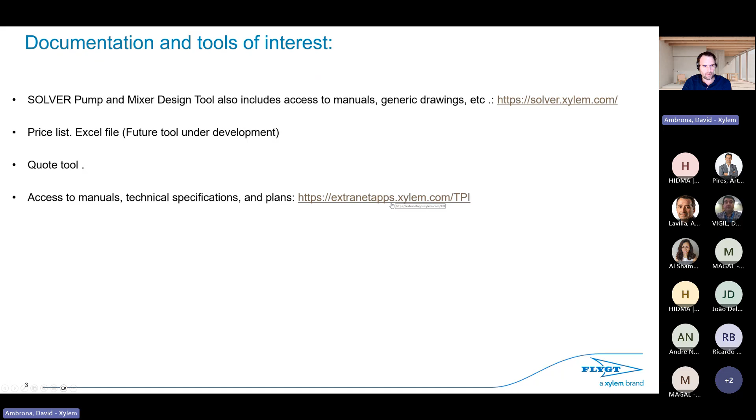Bidding rules — this is very important. I guess you have access to a list of clients that are managed by Xylem directly. I'm not sure how this is organized in Portugal, so in that case, again, contact your account manager.

Where not to design or bid directly from the partner - we've set some rules, though of course we can make exceptions. This is just for better coordination with Xylem. This applies when we're in the project phase, as a consultant, and we want to specify all the Xylem products - perhaps you're managing some of the products, but not all of them from Xylem.

That's why it's important to be coordinated during this phase and also in the tender phase - sorry, the translation wasn't done properly, let me correct it, it's tender phase not bidding phase - because we have multiple contractors from different regions, and a mix of different clients. During the tender phase, when we have many contractors bidding for the same project, this coordination will in theory be managed by Xylem.

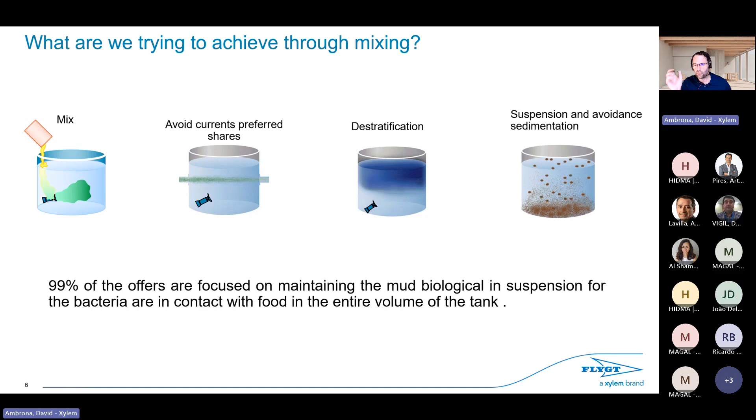This is very important, because even today many consultants and customers are still designing with the wrong parameters, I would say. We even have a book at Xylem that we developed - a mixing handbook, maybe 50 or 100 pages, I don't remember, it's quite intensive - that explains the theory of mixing. This is just a summary of that handbook.

What is important for mixing is the process requirements, which depend on the particle size, the density of the particle, and other things. This process will require a specific speed, which we call bulk velocity, because in a tank we need to maintain a specific average speed or velocity throughout the whole tank. That's why it's called bulk velocity. To keep this velocity, which avoids sedimentation of the particles, we need a push or thrust from the mixers. So this is the parameter that we need to design a mixing tank.

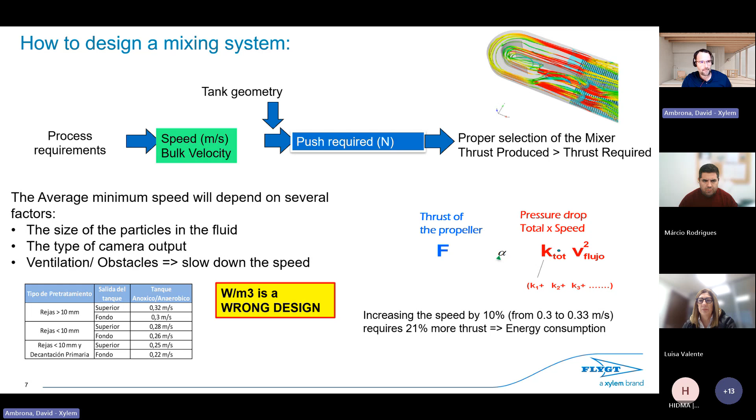So in order to also explain to the customer about such a wrong design ratio, we have these two formulas that explain the push or the thrust of the mixer and the performance, the efficiency of the mixers. There is a relation with the speed of the blade, the rotation of the blade or propeller, and the diameter of the propeller.

So at the end, the most efficient mixer is the one that provides a lot of thrust with low energy. To achieve this, that's why we have the banana blade—a mixer that has a big diameter blade, while the speed, the rotation, is pretty low.

We can do this because we have a gearbox here. That's the way we reduce the motor rotation speed to a much lower rotation speed. This is the reason why the banana mixer is 5 times more efficient than this one for the same application.

Here we did a simulation of the same tank shape, length, width, and depth of water. As you can see, it's exactly the same shape, same volume, designed for the same velocity. What we change here is only the model of the mixer: these are the banana mixers, and these are the compact mixers, similar to this one.

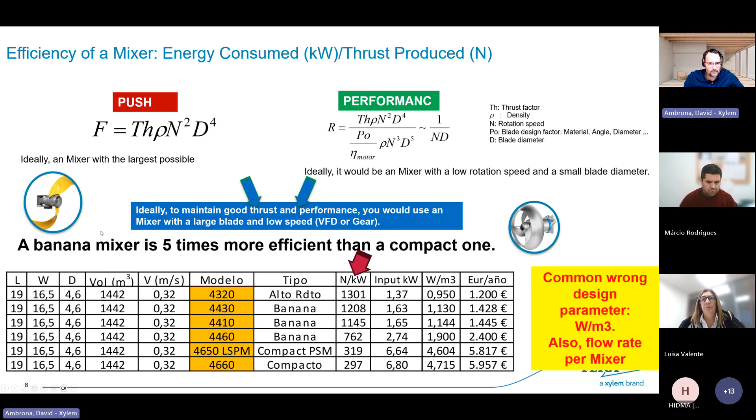Also very important when we're talking about thrust is how to measure the efficiency of a mixer. I can say that one of my mixers can provide, let's say, 1,000 newtons, but how do you check it? How do you check it? How can our objective customer test this?

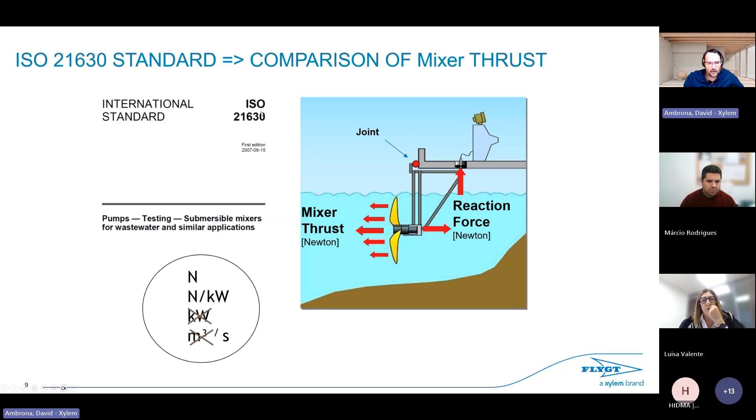There is an ISO standard that specifies how to measure this, and we have at our factory in Emmaboda, Sweden, a bench test where you can even test the mixer thrust. There is a rule or regulation that describes how to do this process, so all our specifications—the thrust you see in our technical specifications—follow this international standard norm.

Something also important to understand: if we're talking about biological reactors, the main application for mixers, this is a conventional activated sludge plant where you have a biological reactor and then a secondary clarifier where you separate the sludge from the treated water. The treated water goes here, and here you have the sludge—almost 100% of the sludge is recirculated to the biological reactor, and the other sludge goes to the sludge treatment line.

So we need mixers in the biological reactor, but usually, as I said before, when we don't have aeration, there are some chambers—anaerobic, anoxic, or even facultative—where you need to apply mixers. But there are some specific, non-conventional biological reactors that it's important for you to be familiar with.

For example, MBRs. MBR is a membrane biological reactor where, instead of using a sedimentation basin, you use UF membranes to separate—to split—the sludge.

For these applications, this title is in green, meaning that from the design point of view of mixers, you don't care. You can design an anoxic zone the same whether the customer has an MBR or not—it doesn't change anything. So the design for a mixer for a conventional biological reactor and an MBR is exactly the same. It's just the dimensions of the tank, that's all. For SBR, it's the same.

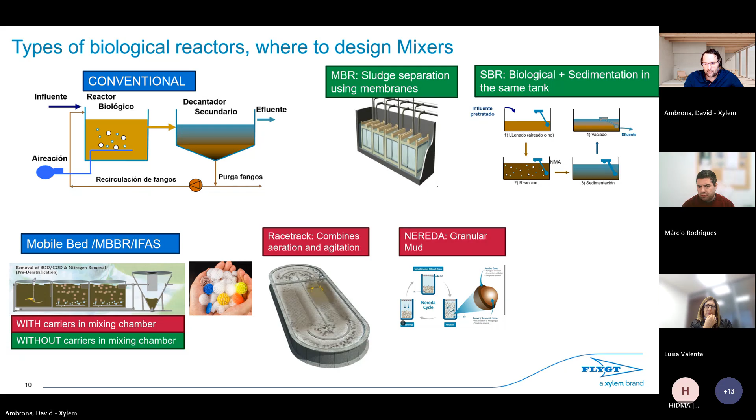Okay, our products, I guess you already know all of them. Just to inform you that the 4610 is phased out, so we should not continue promoting it. It has been replaced by the 4620, because in the past we did an exercise of simplifying our portfolio in order to be more profitable and not have too many models.

We don't have the IE3 motor on the compact ones, okay, but we have it on the Banana, okay. We have the fixed speed mixers portfolio and the variable thrust mixers that have the VFD integrated in the mixer. We have compact mixers, as I explained before, and then the Gear 1 or the Banana ones. And the same with the integrated VFD, which we have with the compact mixers and also with the banana mixers.

Okay, so we have all of these models for the compact one and all of these for the banana. For the integrated VFD, just for your information, which I think is very important, all of these mixers include an equivalent IE4 motor, and we have 2 models for the compacts and 1 for the banana.

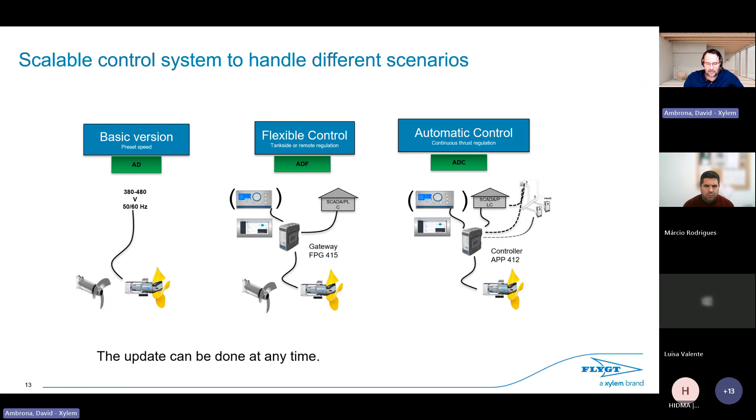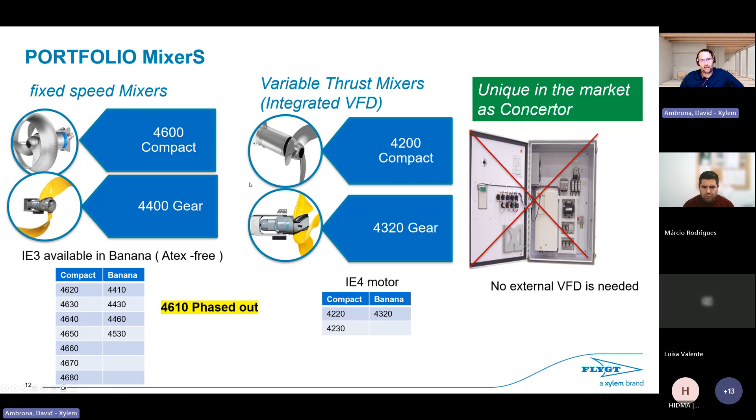Anytime you want, because the first way to learn is learning by doing, if you have these VFD situations or scenarios, please contact us so we can help you better select the right gateways and control systems for when you want to sell these kinds of mixers. Again, these kinds of mixers are very important to promote because we are unique, and it's the best way to improve the efficiency of a mixer, which I will explain later on.

If we are talking about variable thrust and why we need it, as you probably know, in many biological reactors, a mixer is not like a pump. Depending on the configuration, you can adjust a pump to provide more flow rate for the same pressure, but if we have a mixer in a chamber, that mixer is running at full speed all the time.

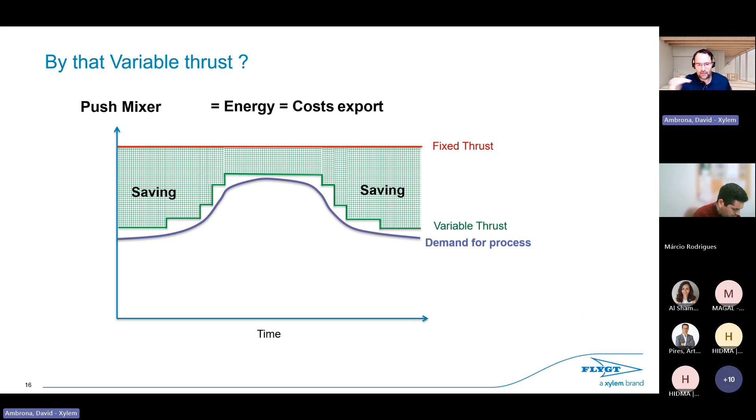But from the process point of view, you don't need the tank or chamber to be fully mixed all the time, because sometimes during the night, for example, you don't need complete and perfect mixing in the chamber. You can turn down or adjust the thrust of the mixer, because even if you reduce the thrust, you keep enough suspended biomass in the tank, and you are consuming less energy in the mixer.

Something where this variable thrust has more impact is in the racetracks. The reason is that the aeration from the diffusers, when aerating the chamber, acts as a kind of brake on the velocity of the racetrack. So for example, if the mixer is always pushing at the same thrust, the velocity of the racetrack will change if the aeration is increased. If you increase the aeration, you will reduce the velocity of the racetrack.

That's why when we are doing the design of a racetrack, this is something we want to keep at Xylem, but we will see in the future, we also allow and provide you the tools to do it by yourself.

When you increase this aeration, we obtain different thrust. For minimum aeration or without aeration, because sometimes in some plants people are playing with a biological reactor, they turn off the diffusers, so the only obstacle is the grids physically, which is already an obstacle for the velocity. Sometimes during the night or with less flow rate, they need minimum or medium aeration, or during the morning peak with a lot of ammonia and BOD, you need to increase the aeration of the diffusers. For these 4 situations, you will obtain 4 different thrusts from the mixer.

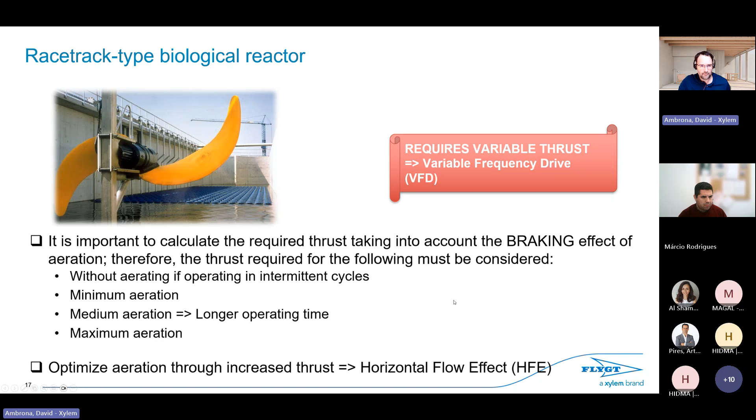Then we have another important impact on this design called the horizontal flow effect. In a racetrack, for example, the aeration grids supply air from the bottom, and the water goes from left to right because of a mixer pushing the water in this direction. If you design a conventional mixer with conventional thrust and velocity, you will have problems at the inlet and outlet of the aeration zone.

You will have this kind of vortex creation, and this vortex causes all the bubbles in this zone to go up much faster than others. So the contact time of this bubble in the water is less, since the uplift velocity is much higher, and they transfer less oxygen from the bubble to the water. That's why this design has a negative impact on the aeration efficiency.

A way to balance the impact of this vortex is to increase the speed of the mixers. If you increase the speed of the racetrack, you will neutralize this vortex phenomena and improve the aeration efficiency. Tests have shown that increasing the velocity can improve aeration by 10 or 20%, and you can save about 15% of energy, because pushing at higher velocity consumes more energy in the mixer, but you save much more energy on the aeration, since aeration always consumes more energy than the mixers in a wastewater treatment plant.

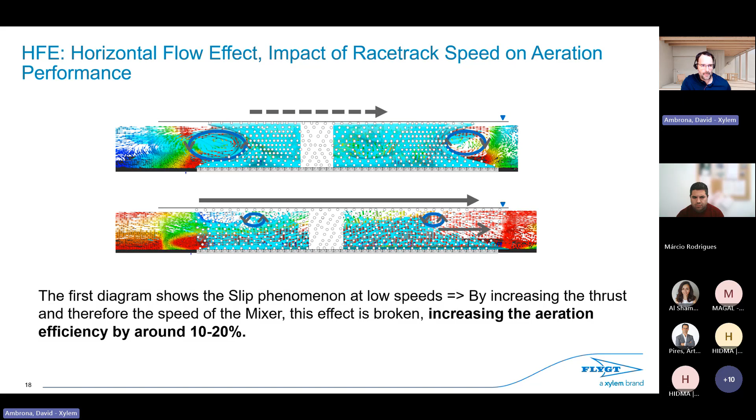I don't want to spend too much time, but here's an example: using a fixed speed mixer, this conventional banana, we have a fixed energy consumption of 7 kilowatts. But if we use a variable thrust mixer, the 4320, we can adjust the consumption of the mixer depending on the aeration, and you can save even 40% of energy.

Changing the mixer from the conventional banana to the VFD banana can be only a 15% price increase, and you can deliver to your customer 40% energy savings. Again, this is something only Xylem can do - the competitors don't have this kind of mixer. That's why it's very important that we convince our customers with this type of variable thrust mixers.

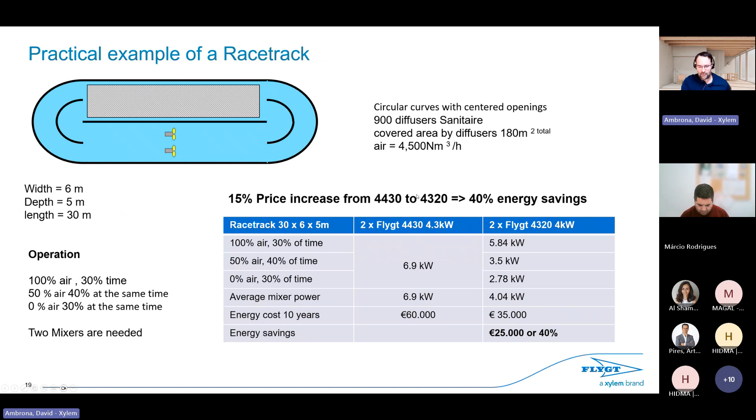Even in a plug flow biological reactor, where you don't have the racetrack loop - even in this, which I imagine is an anoxic chamber - you don't need to mix this chamber 100% perfectly. Even if you mix it 70%, the biomass is well mixed enough, perhaps good enough during the night, and you can achieve the same effluent requirements in the wastewater plant while reducing the energy of the mixers.

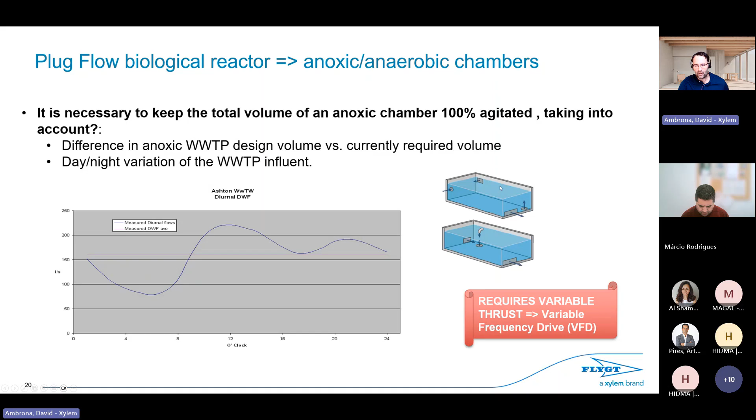This, of course, is more useful and makes more sense to apply and suggest when we are talking about the big biological reactors. In a small one, don't spend time on this.

Also very important, when we are trying to convince a customer, and this is a clear example that we have in Spain: the wastewater treatment plant of Bilbao, north of Spain, capital province. It's a huge wastewater treatment plant. As you can see, the size of this biological reactor. This is a plug flow biological reactor, so this is an anoxic chamber, a huge one.

In many plants, they are using compact mixers, a lot of them. But in this plant, the end user preferred to use banana mixers. And now we are selling even the banana with VFD because it consumes much less energy than with the compact mixers. And depending on the size of the banana, you can even use the conventional guide bar that we use for the compact ones.

But what is important, of course, is when you install the banana, you have to be cautious with the distance from the banana to the wall. With the compact mixers that's not so important because the blade is much smaller, but with the banana, the position is very important. Sometimes we need to do some kind of extension in order to install the banana far away from the wall, because there are some distances that we have to respect.

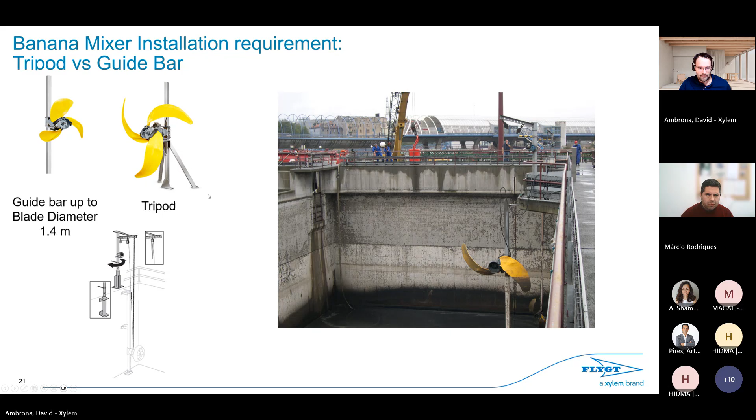Another example, but again the main one is the racetrack, I would say, and the big anaerobic anoxic chambers, is when we have a sludge storage tank that the customer is asking us to install or design a mixer for. For example, the concentration of solids in the sludge is so high compared with a biological reactor - we're talking now just about the sludge treatment line, not the biological process. In the biological process, you never reach this kind of concentration.

But in the typical sludge treatment line of a wastewater treatment plant, you can achieve concentrations about 2%, which is equivalent to 20 grams per liter. Sometimes they are mixing different sources of sludge, and that's why the concentration of the sludge in such storage tanks changes. When we're talking about concentration around 2%, the thrust that you need changes based on the concentration.

Below 2% or 20 grams per liter, the thrust is the same - if it's 1% or 0.2%, it's the same thrust. But above 2%, because it behaves as a non-Newtonian fluid, you will require different thrust. That's why at 3%, 5%, same volume, 6% or 10%, the kilowatts or thrust of the mixers is completely different. If you have a variation between 3 and 10% concentration of the sludge, it means you need 10 times more energy or 10 times more thrust.

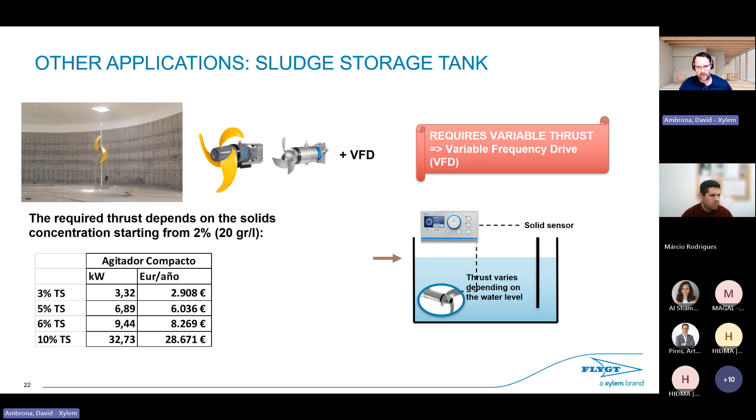Also, sometimes customers don't trust our design because they think that the mixers we are offering don't seem big enough. So one way to justify to a customer that our design is good enough is measuring the velocity in the tank with different sensors, or the homogeneity of the solids - measuring the concentration of solids at different points and different depths - in order to convince and demonstrate to the customer that we are mixing with...

...a confidence of plus minus 10%. This means that if you put different MLSS sensors to measure the solids at different points in a tank, the difference between the sensors cannot be more than plus minus 10%. This is something like a process warranty, but it's very important - if you need to convince a customer with this kind of approach, we are telling you that we can do this, but it should be very special, and you should never offer this without contacting us first.

And also the try and buy. Sometimes, for example like Concertor in the past, and now with these VFD mixers, sometimes the best way to convince a customer for a new kind of mixer is to test it. So if you want to apply a kind of try and buy for these VFD mixers, that's something perhaps we can do. But before offering this to the customer, if you see this possibility, please also contact your account manager to validate it.

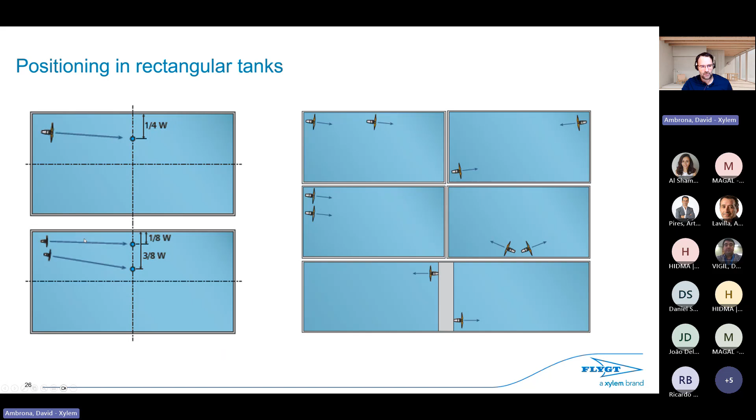Also, it's less common, but we also have circular tanks. Again, the best way to learn all of this is case by case, so contact us. This is much less frequent — 90% of the applications are the previous one.

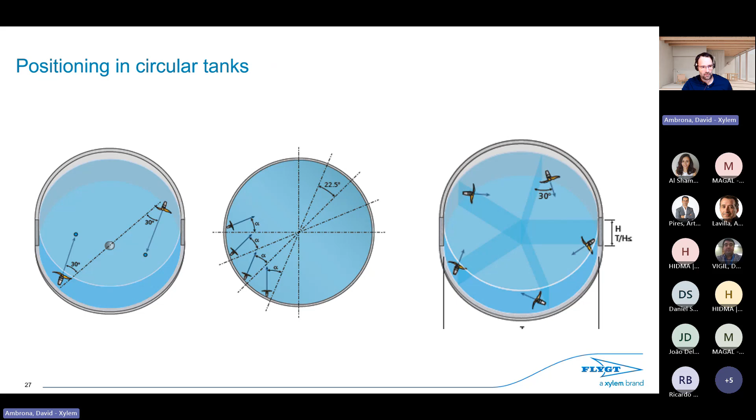Also, as I said before, for the racetrack, please contact us, because there are a lot of different positioning considerations, not just for the mixers but even for the aeration grids that have to be used. This is very important because this is perhaps the most complex application for mixers — if you don't follow these distances properly, you can have vibration and problems with the mixers.

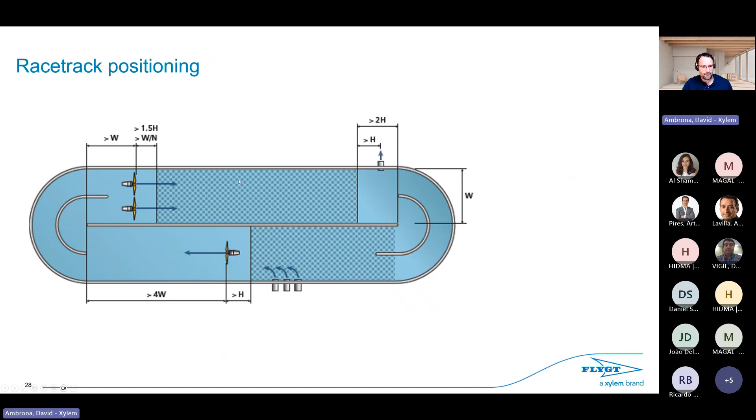Any questions? Otherwise, I will hand over to Kenda to explain how to use the design and selection tool.

Sure. Good morning, everybody. My name is Kenda. I work now for WSS segment as a business developer, but in the past 8 years, almost, I was working with mixers. So that's why now I'm doing the part of the selection of mixers in the solver.

Okay, so I will share my screen. We will be switching between two documents. The first one is this design guide for mixers, and then the tool, the solver tool here.

So I guess most of you have access to the solver tool, I think. If not, you need to register. So you register — oops, here I will switch.

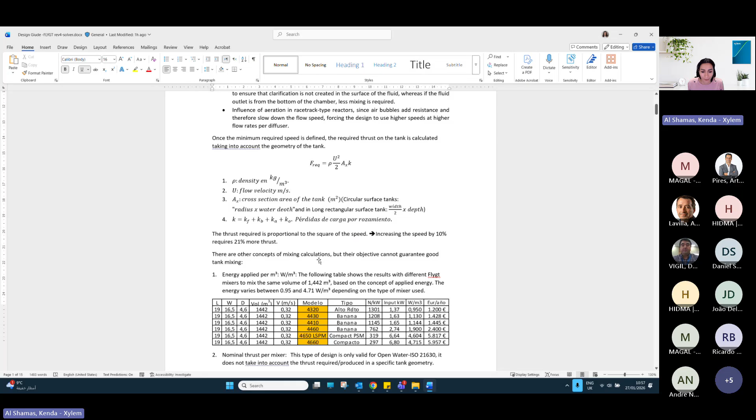Here we start, so you need to go to this link. If you don't have it, I think David mentioned it in his presentation. Then you have to, do you want to register? You have to contact Domingo to ask him for access to the mixer design. Even if you have access to the solver now, you might not have access to mixers because of some limitation there. So Domingo should allow you to enter the mixer design as well.

Here we start, so the first one — you have to open applications by application or by product type, or by search. We usually use search to be able to design for the conditions we have. So you must default to this path: search and get started. All of this is here.

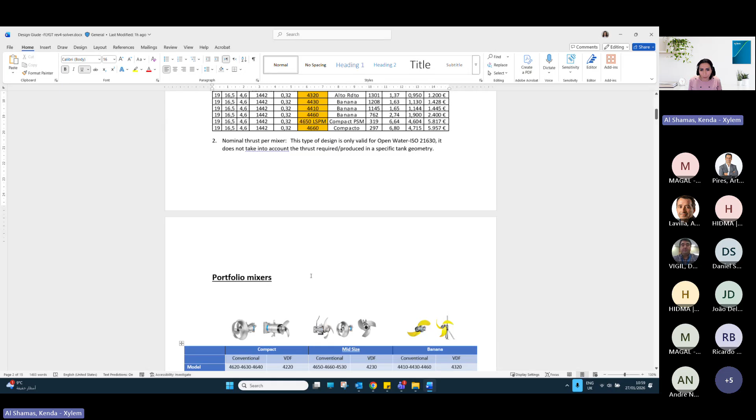But before I go, I will just show you something. Here is a general concept of mixing, which is what David was explaining — it's just a short part of it, okay?

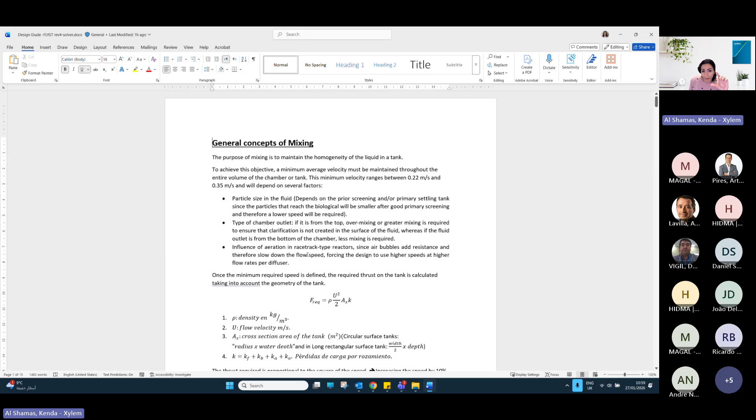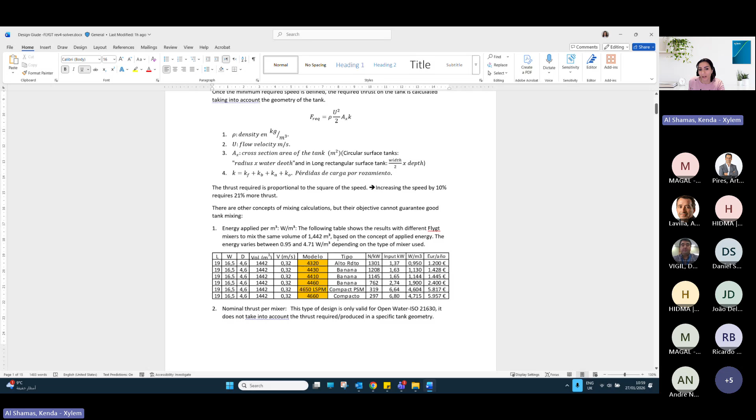Just a summary. So the wrong concept to design with watt per cubic meter. This is just for your information. And then a summary of our Xylem portfolio from the mixer side, divided into 3 types.

Compact, which is the smallest one, the conventional, and the one with VFD which is IE4. You have the range of thrust we can offer. In the compact mixer, we don't have IE3.

Sorry, I mix between Spanish and English sometimes. IE3 is not available in compact mixers. Meanwhile, for the mid-size it's like 4650, 4660, and 4530. 4530 is only available in IE3, for example.

So this is a summary of what we have. The banana mixer, whether we have it in 2 or 3 blades - here we always have 3 blades - and what kind of material we have. Here I mentioned that the 4410 is now only available in IE3.

In the past, we had the standard one, then conventionals, then without IE standardization, and now with IE3. So this is for the banana mixer. But with this initiative to simplify our product line, the 4410 standard one was taken out of our portfolio.

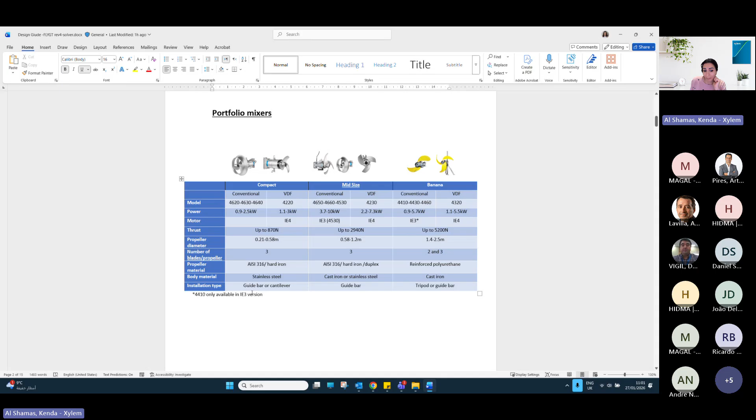So here you can consult to have an idea of what we have in our portfolio, and also the installation type - whether it's with guide bar, with cantilever, or with a tripod. So now we go back to the tool.

Here is how to get access as we explained, and here is the get started section. Here we don't have anything yet, so we need to add the product.

So we go to SR, and you have 1, 2, 3, 4, 5 types. So I will repeat it 5 times to get all types of mixers.

So now I have 42 and 43, which is IE4 with VFD, integrated VFD - this is the variable frequency. And 44 is banana, 46 is compact, and 45 is the mid-size with IE3.

Here it's explained - you have to add SR products and repeat the step 5 times to have all the models. Then we go on - now we need to select the tank shape.

If it's circular, rectangular, racetrack, or closed ditch. As David explained...

If it's racetrack or closed ditch with diffuser, the Xylem application engineer will do the design for the time being, because it's usually combined with diffuser design as well. The diffusers should also be considered in this design for the mixers.

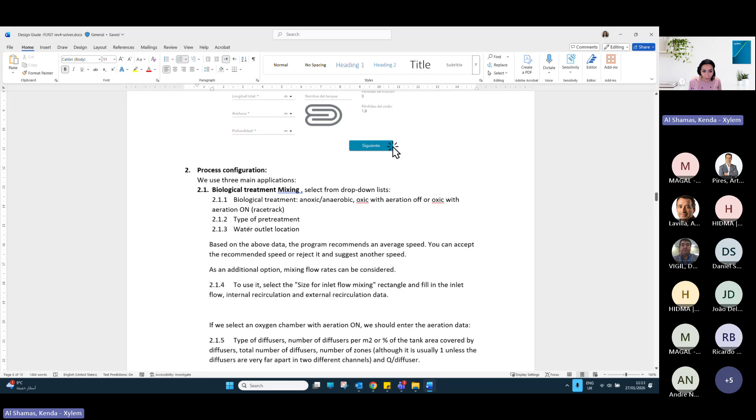So the third item we should identify is if the outlet location in the tank is top or bottom - the water outlet location. If it's in the top, look, now we have recommended velocity 0.25. So we say in the top, but if we tell the program that the outlet is in the bottom, it will reduce the recommended velocity. Why? Because if the outlet is in the top, we need to avoid clarification.

Sometimes the liquid gets clarified at the top, at the surface. So to avoid this, we need to overmix, and it depends on this. There's a velocity recommendation - for example, at the bottom it's 0.19, at the top 0.25. So we'll keep it like this as a primary, the top 0.25. Sometimes we can size the mixing more accurately.

Here when we put size for inlet flow mixing, in this kind of configuration we need the inflow rate coming to the biological basin - the internal recirculation and external recirculation. You might have like 100 cubic meter per hour. The internal recirculation might be another 100 if it's 1Q or 2Q, so another 200. So it's like 300, you can put here 100.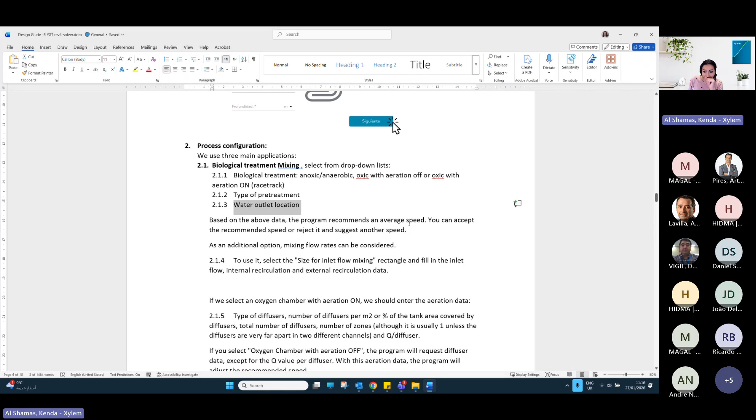Based on the above data, it will give you the recommended velocity so you can reject or accept it. Then size for mixing, the rectangular one. So this is what I explained.

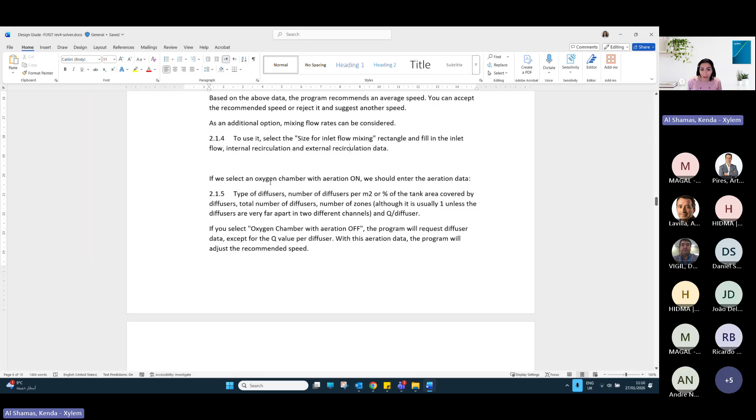If you select aeration - even if it's not your responsibility, I'll explain it a little bit - the program will ask you what kind of aeration you have. You have to enter the bottom area covered by diffuser. If you have a racetrack configuration, you have to see what area is covered by diffusers and enter a number of diffusers, and then the percentage will be calculated. If you put like 10, the percentage will be calculated.

You need to add one on another, so if the number is like 15, you need the flow rate per diffuser as well. This depends - there's a lot of information here. You need to be aware of the design of diffusers - might not be Sanitaire 9-inch, might be another type or managed diffusers, and you can configure them. You need to select which kind of diffuser, the area of the diffuser, click add new, and select the active area. It's more advanced, but you can discover it yourself.

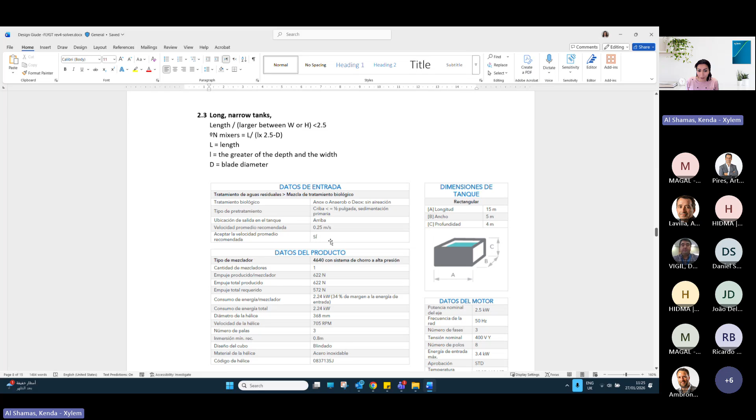It's explained here, then you can view the results. Here, narrow tank, here is a slurry. We select manure, and in the manure you need to add the version 300 or 310, 311 in the Phoenix, but also the tool will show you just the type of mixers available for this kind of slurry.

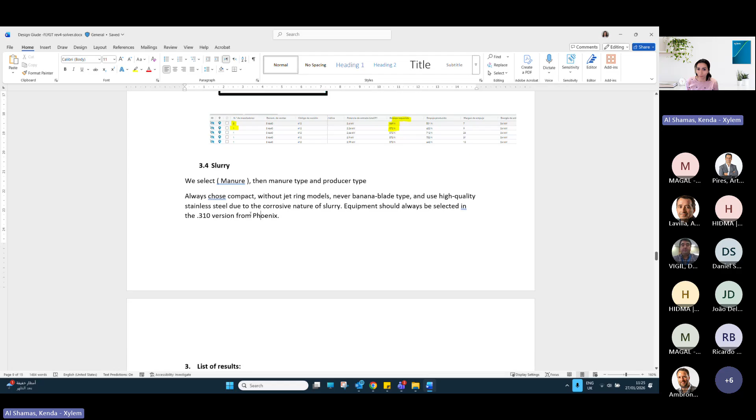We will go back to the biological treatment - here's the one, and to see the results. Now we are in the phase to see the results. Later I will explain the long narrow tank. So here we have different types of mixers, how to select. This one I will come back later to.

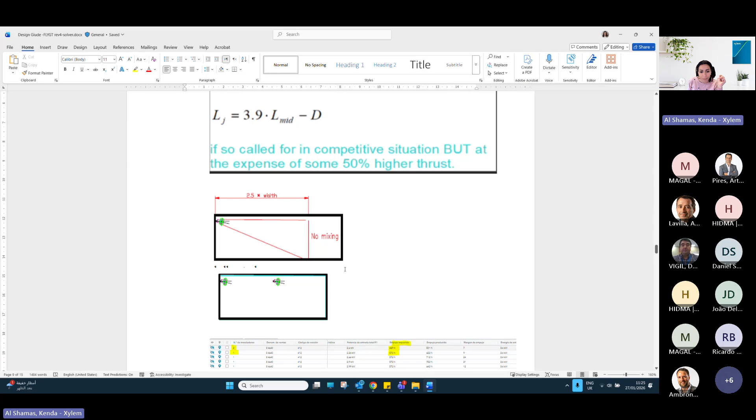First we have to know these points. First, mixers that begin with 44 or 43 are banana type. They have diameter of the blade 1.4 to 2.5. We have 2 or 3 blades.

Mixer with 46 or 42, we are speaking, they are compact mixers. The diameter of the blades is from 210 millimeters to 776 millimeters. The 4530 is the medium size, with diameter 1.2, and only available in IE3 800 motor.

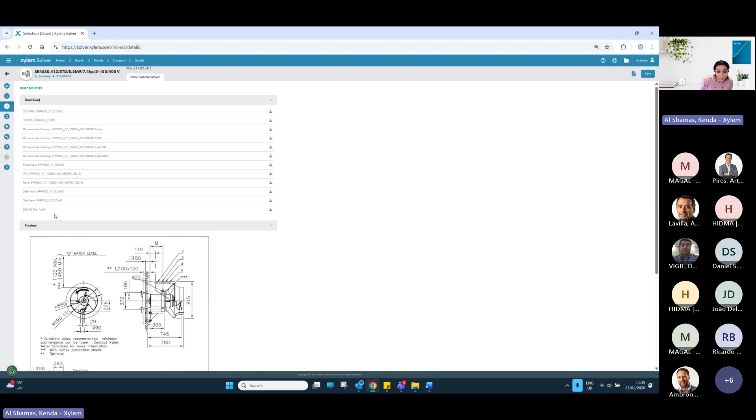Documents, here the IOM - you have the part list, you have technical specification, you have the basic repair kit, everything, specification. For sludge mixing, you can download it.

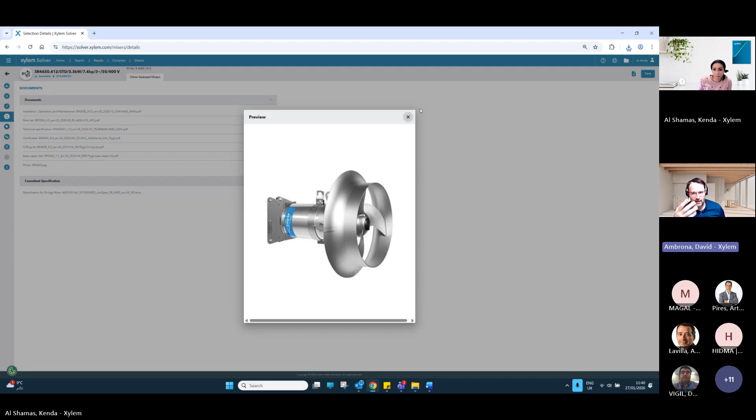Something important here is that such documents that Kenda is showing, I think they, in the solver by now, are in English, as far as I understood. But if you go to the link I showed in the first or second slide of my presentation, such a link in the TPI, you can find the same documents, but already in Portuguese. Unfortunately, you have to go to another website to find it in your local language, just for your information. Nevertheless, we are working with the people from Solver in order to also show in this selection tool even the local price list and better information about the configuration and everything. So in the future, some months, you will not need to go to another website or use the Excel files I will explain later on. We are under construction with all of this, but I think sooner or later, more sooner than later I hope, you will have even here in this tool the price list.

If you have the price list, for example, as David said, you can see here 20,000. I don't know if it's because I am an internal user, but I can see that this is more. This price is the international price list, not the Portuguese price list. So please don't use these prices, because you cannot apply such a price list. Every country creates its own local price list.

So the prices you have to use - don't use this information on the website for now. You have to use the Excel file that I will show you later. But in some months, the local Portuguese price list will be implemented in Solver, and the numbers you see here will be the right ones, but not now.

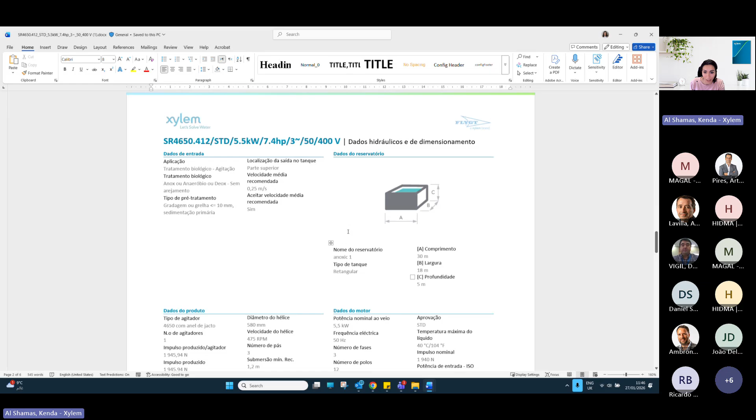So we will generate the report, the final report with the local language - this one, for example. So you have it: the specifications, the selection with the tank geometry, the drawings, and that's it.

So here, if we go to the guide, you can see the product information, design and model data in the dimension tab on the left. You can download the plans, the drawings. In the document tab, you can download the technical specification, IOM, and part list.

To download the selection sheet, click print - this is what we did. Document, select, click print, select the language, select the document, and then you can download it from Generate PDF or Word. Then you will use some information from here - this is what we worked on actually, the information that we give to the tool.

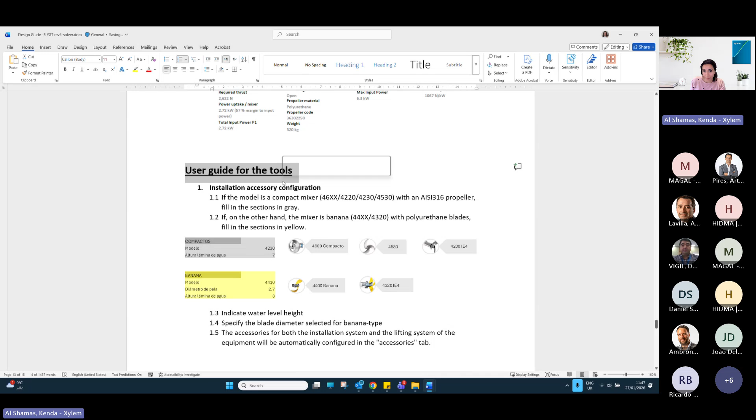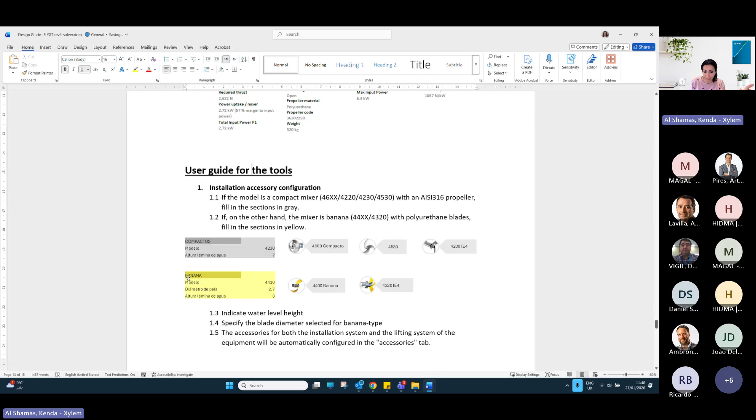And now the tools that David will explain after me includes the accessories. If it's compact, it's gray color. If it's banana, it's yellow color. So you just need to put the model and the water level model, and for the banana model, the diameter or blade diameter and the water level.

And for the accessories, you go to the tab and see the accessories for this kind of mixer. Then you have the technical specification, also an Excel tool. You have to fill in some information. All of this information is here in the selection.

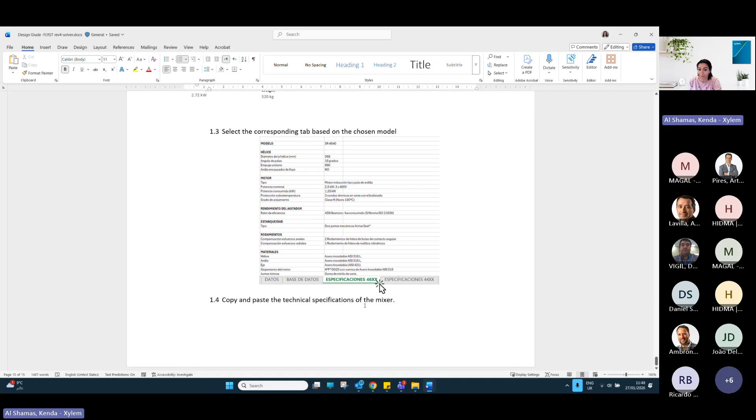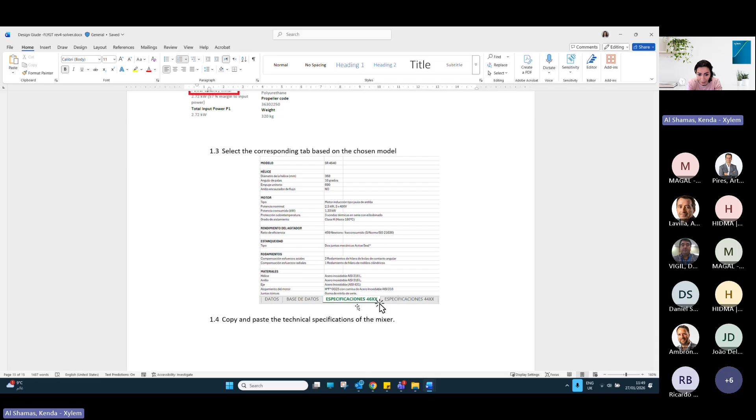Or from the report, I highlighted the information that you need in the tool. This is the tool. Then you go to the specification for 46 or specification for 44, and this is the kind of specification that will display. So you can take it. This is, for example, for consulting companies doing specifications for tenders, to help them have the specification modified, so you can do it like this.

And finally, we have the long narrow tank. Before this, this is the last step. This is important because sometimes we have something like a long, narrow tank—rectangular where the length to the width or depth, the largest between them, is more than 2.5. If this formula is correct, we identify it as a long, narrow tank.

This question came up during David's presentation. Each mixer has a distance it can reach. So even if you put the biggest mixer here, it cannot reach more than 2.5 from the width or the depth, because of the geometry of the tank.

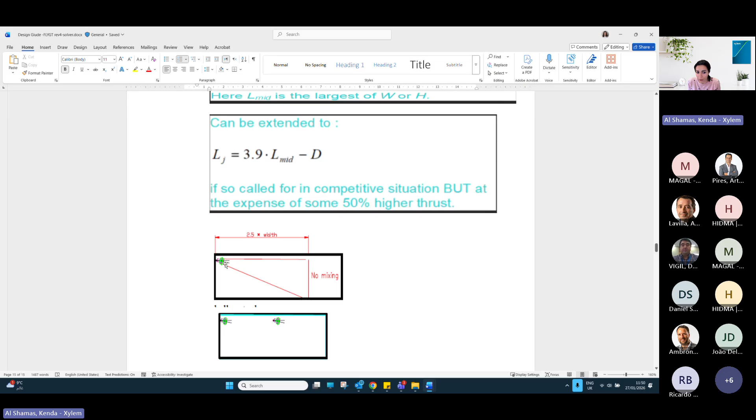The flow force will disappear because of the boundaries of the tank. So this is the formula: each mixer will reach 2.5 from width or depth. This one minus d, where d is the diameter of the mixer blade, but normally it's very small, even for banana.

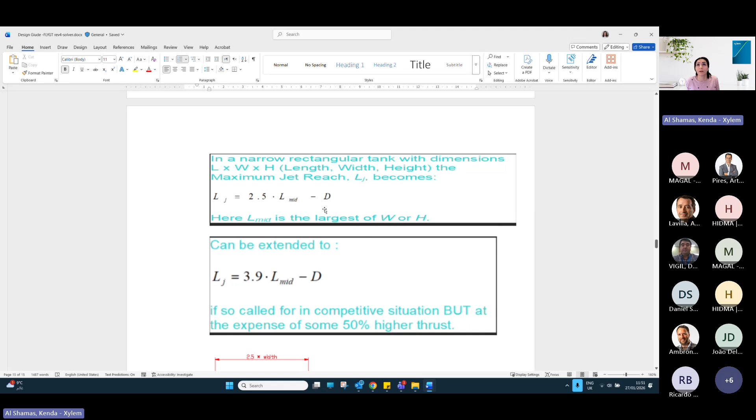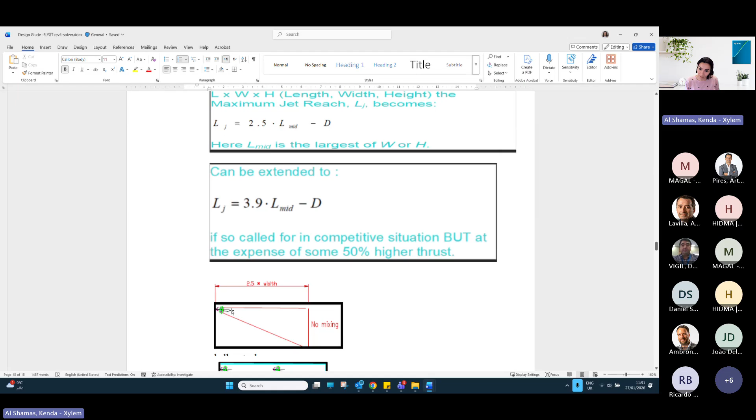For a compact mixer, the largest one is 0.7. We can sometimes force one mixer to reach more distance. Now I will show you how to do it in the tool. Otherwise, you need to put two mixers.

Now, this same tank with the same dimensions—for example, the same length but wider width—might be able to be designed with one mixer. But if the tank is smaller because it's a stretch, then you need two.

Sometimes I had a discussion with a customer asking how I could put two mixers for a small chamber and one mixer for a bigger chamber. I said yes, this is what I need to put, because this is what the design requires too, since here you have more losses because of the tank shape.

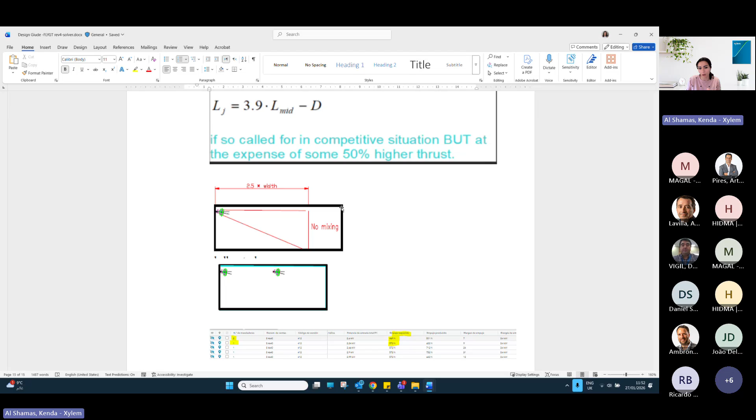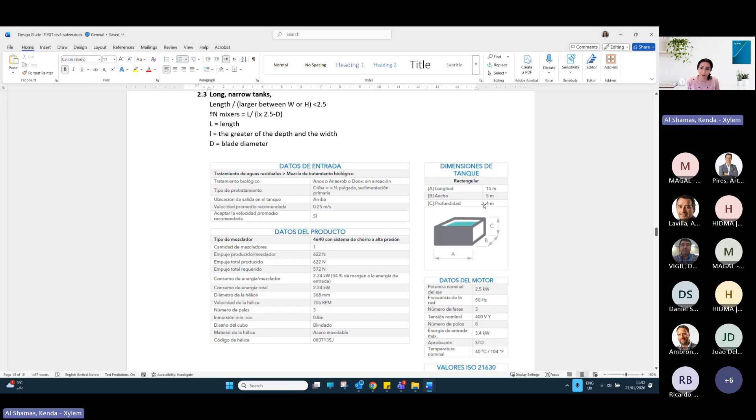So how do we put this in the tool? How do we use the tool for this? We will use this example: 15, 5, and 4. We go to tank shape, rectangular, standard, and input 15, 5, and 4.

Next, we keep it with all of this. Now we will see the results. You can see that they always give us two parameters.

Now I will go here—banana is too small for this. I will go, for example, with 4630. I will select 'use long narrow.' You can see that in the past, when our input did not comply with long narrow tank, this option was not available. Now it's available, so you put long narrow tank, and it tells you no, we cannot force this mixer.

So I go to the next model. I will see if with 4640 I can do the design with one mixer. I select this and tell it long narrow tank. And yes, look, now we have one. Why? Because they require the thrust to be about 50% more.

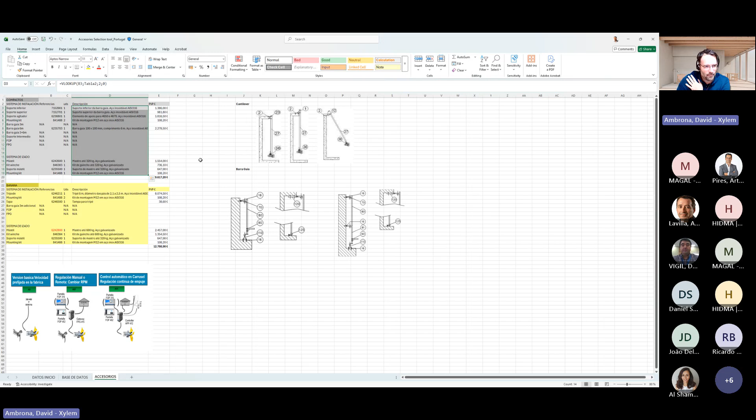So I hope these two tools will help you do the quotation for the mixers and the installation accessories you need. As I said before, in theory within one or two months this will already be in the design tool, so you won't need these Excel tools. But for now, we don't have any other option.

So, any comments? Questions?